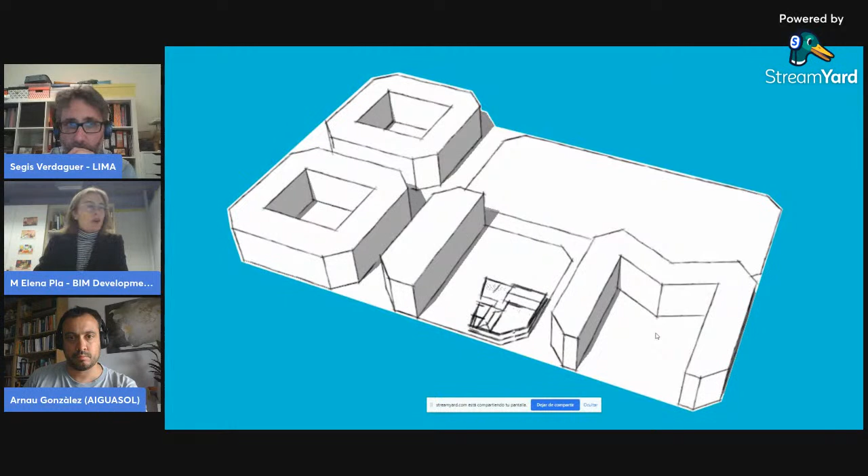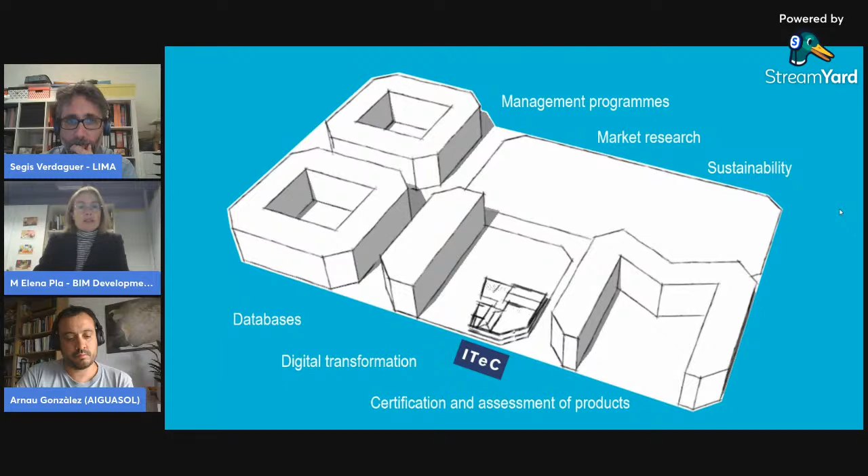So we are placed here in Barcelona. We are, let's say, placed in the eye of BIM, in the eye of the information, dealing with management, market research, sustainability, digital transformation, databases, and certification and assessment of building materials and products. So all this mixed together, when BIM came, we knew we already had some ideas of how to handle these digital challenges that BIM was setting.

What is, in a sense, BIM? I imagine that most of you are aware of it, but just in case there was something somebody didn't know, I wanted to point out the main idea of BIM. The main idea of BIM is a digital method to convert the ideas and to project and develop the projects in the digital environment.

Let's say we have the physical environment, the atoms. We have the first idea of the project, which is to plan it - let's do a school, let's do a building, let's do a stadium. We take these atoms, we plan them, and everything is done in the digital world, besides our heads of course, and we design and build together, and we get to the final product, the physical product, which is the most important product and the final goal, but there is also a digital twin of this final product, which will afterwards help and ease the works of managing the physical product. So this is in essence the BIM process, or the digital transformation in the building sector.

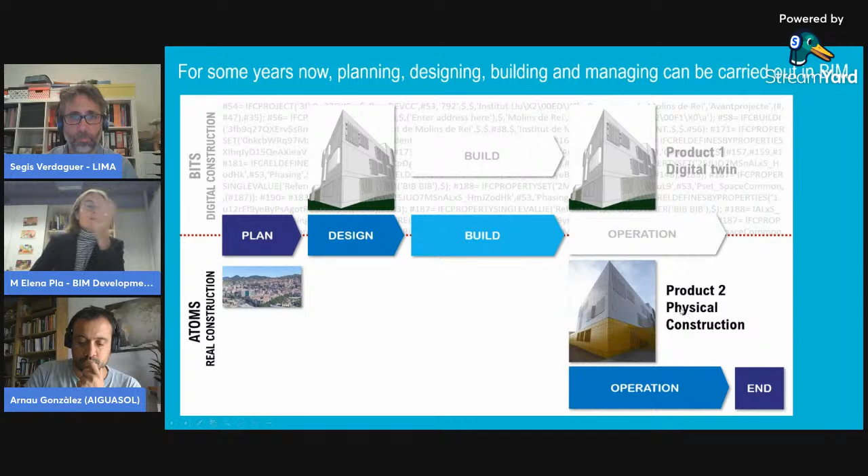And we must be aware that there are two products to be delivered, the physical one and the digital one. No one should think that only the digital is to be delivered, or that anyone working in the middle stages should think that only the physical is to be delivered. So both of them are equally important.

And what does it mean if we go inside this design or build part? How do we work there? We can work with the BIM models enriched with data, with all sorts of structured data, and together what we do is enrich and complement them with the digital databases that we already had, which are very rich and complex to handle themselves, and that cannot be fully integrated in the BIM models, because BIM models have limitations - some elements are not modeled or whatever. So we do this complementary work of databases with BIM models, or BIM models with databases.

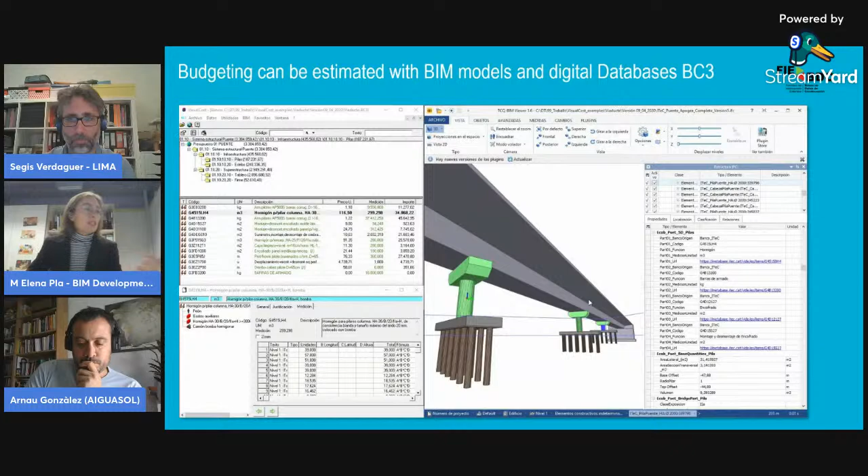So we have this dual digital world. This is how we work. Everything can already be done in manufacturing things - the manufacturing industry is already digitalized. So how do we convert this physical item into a digital thing?

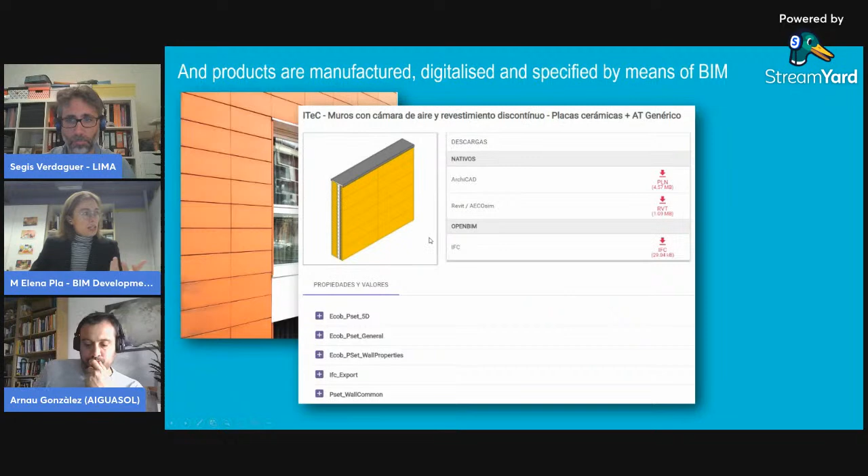Everything should be inside the digital model. This is the challenge: how do we start working? How do we convert this into bits?

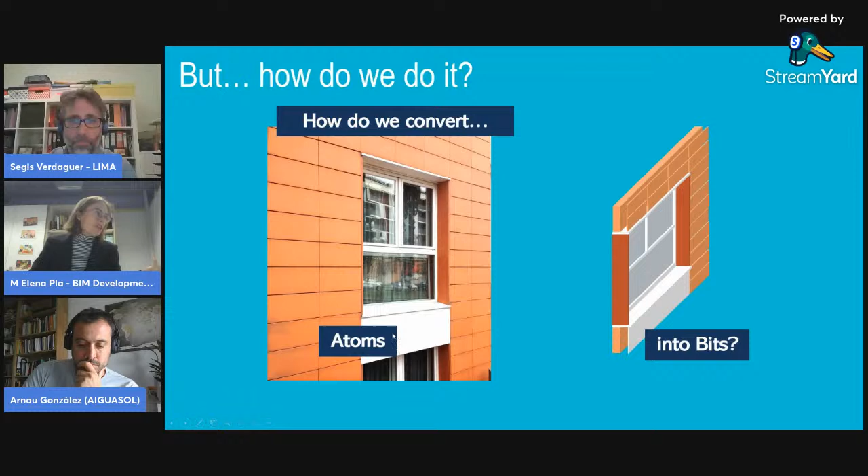Let's say the first bits we think of are pictures. If we look in Pinterest, we can see this kind of facade. But these bits, this digital information, isn't the only one we are interested in.

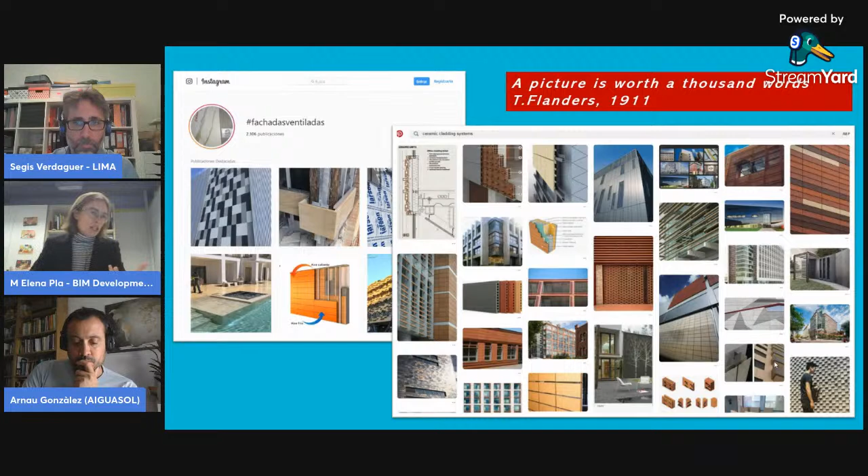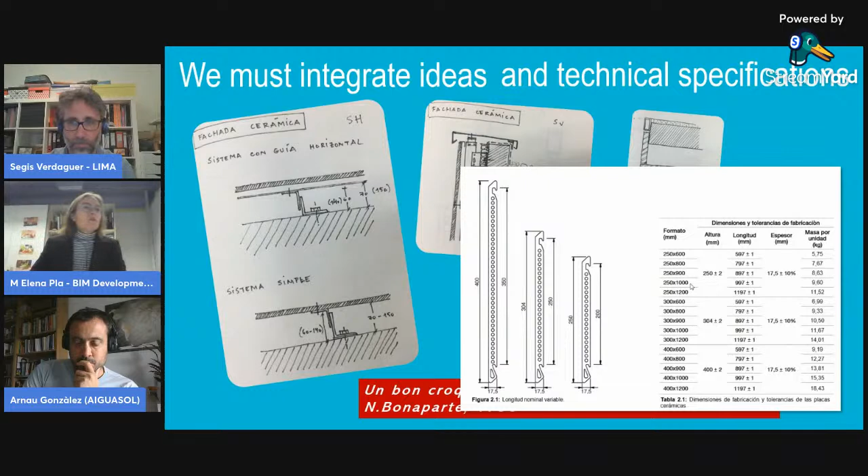We are also interested in geometry, in drawing our ideas and integrating them with the technical specifications of the manufacturers, which is not the same. I may have an idea, but maybe it doesn't fit the size of the tiles, the color, or the kind of material. Maybe it doesn't fit with the manufacturer's definitions.

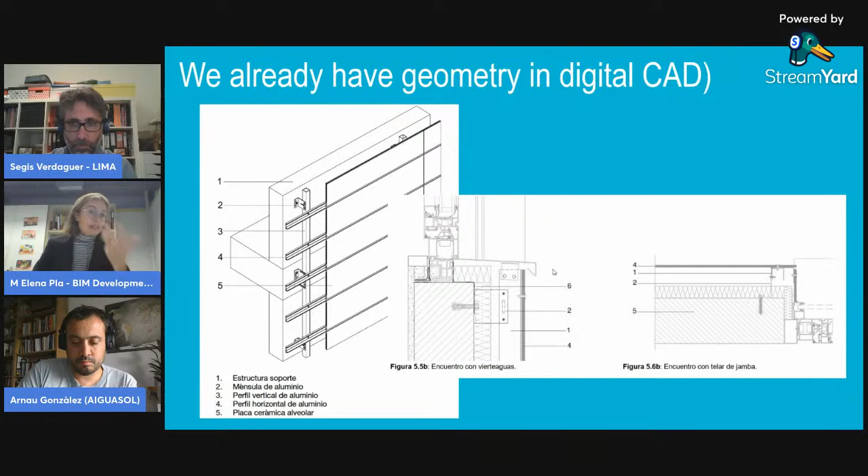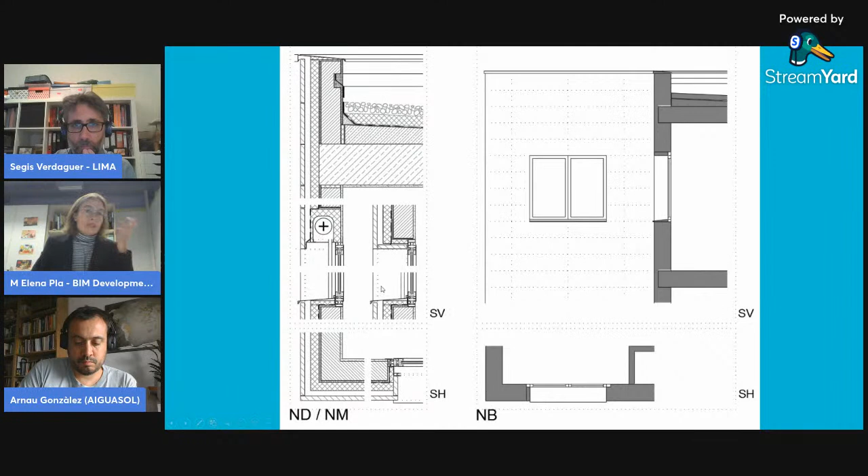So the challenge is that we can count on the CAD drawings of the manufacturer, and we can also count on the CAD drawings of the design team. So at the end, that facade can be converted into this.

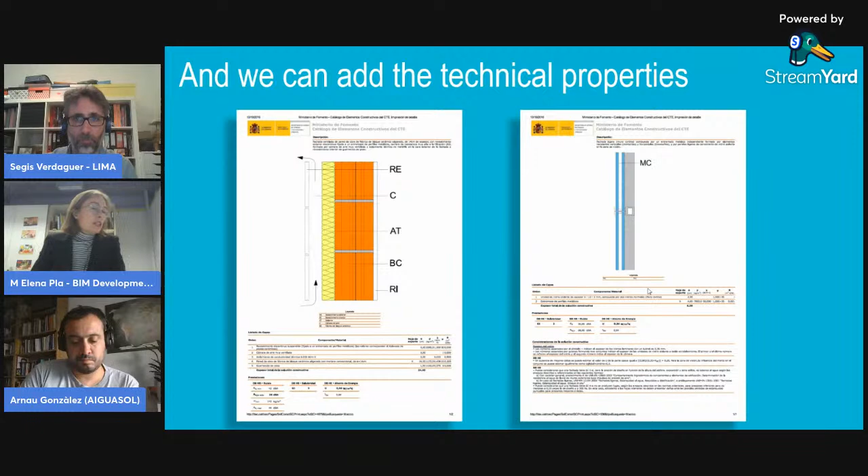And when it comes to BIM objects, we should also think of integrating the technical properties coming from generic items or regulatory conditions that we may have.

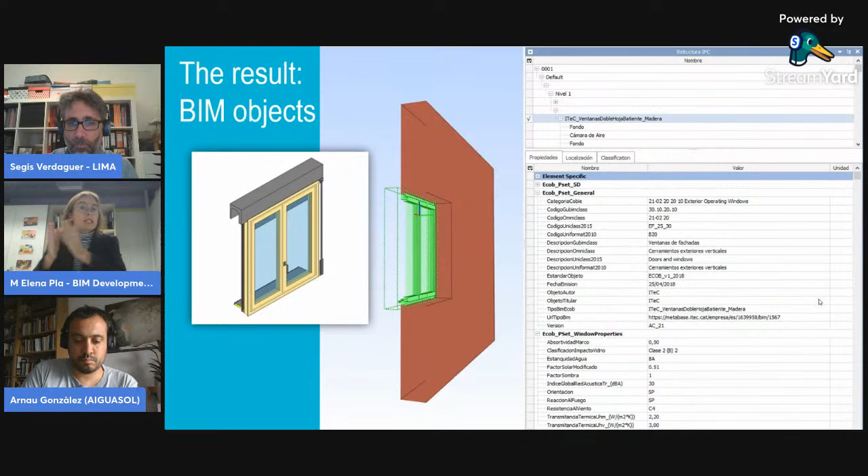Everything can be integrated, so the result is these BIM objects with structured information. And the structure of this information is also a very useful tool you can count on, which is the ECOB standard, a standard for creating BIM objects that defines how to name the properties, technical and management properties, and how to define the values.

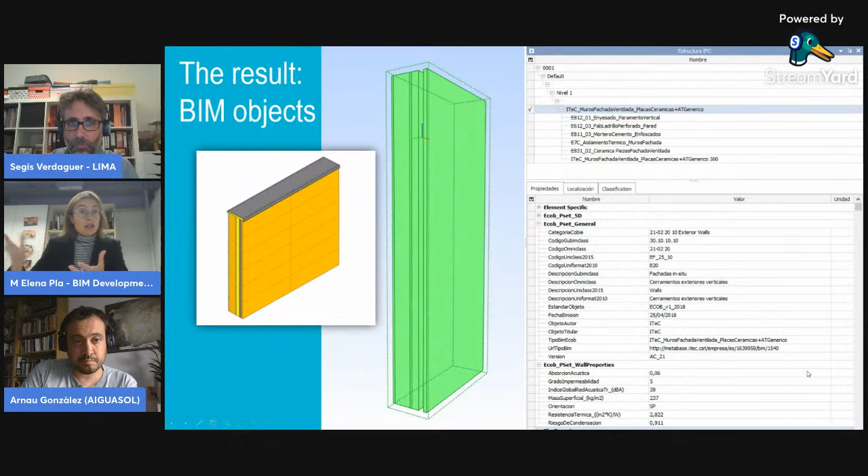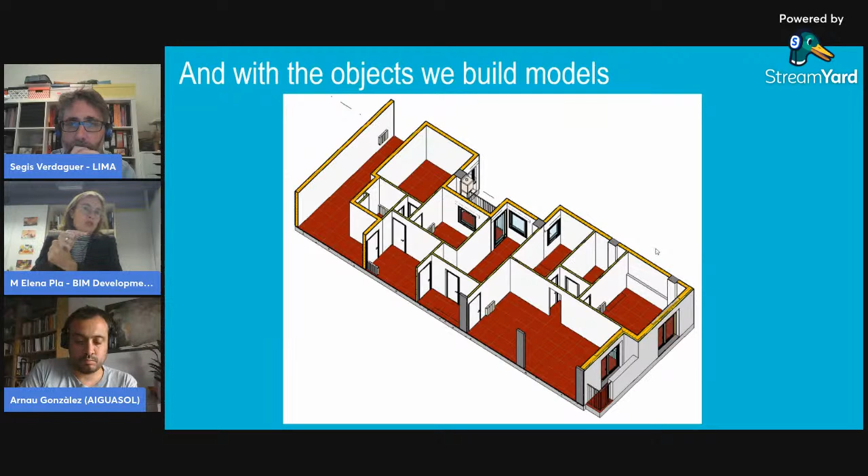So at the end, with these objects, what are we going to do? We have this 20th century plan, but in the digital momentum that we are in, this is the way we should do it now. So every project should be digital in these terms.

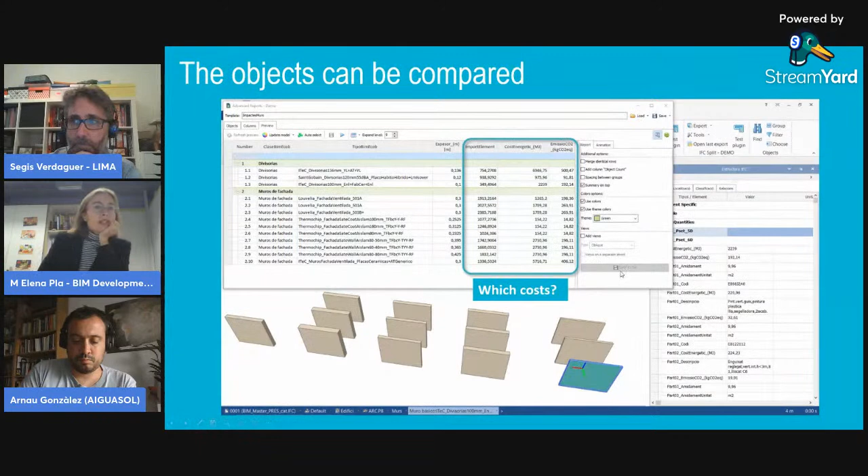This allows us to compare, for example, if I have every kind of wall or facade structured in the same way with the same properties, I can compare. This helps me compare anything that has been introduced in the BIM object besides the geometry. The geometry is already there, the thickness of the wall, but I can also compare the energetic cost if I have it, or the CO2 emissions, or the price.

So this would be the bunch of tools we are working with. We have our BEDEC database of building elements, we have BIM libraries, we have the ECOB standard, and we have these programs TCQ and GMA, and a viewer for this. With all these tools, the result is that at the very end of the project, you can have, element by element, the amount of energy and CO2 emissions, for example.

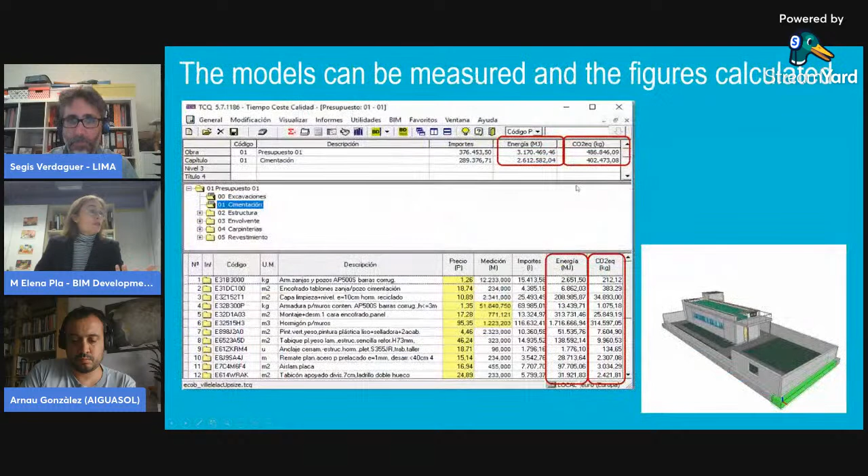But altogether, I can also have the whole big budget. And afterwards, I can pour this data into the BIM model, and I will get this data well structured in the BIM model.

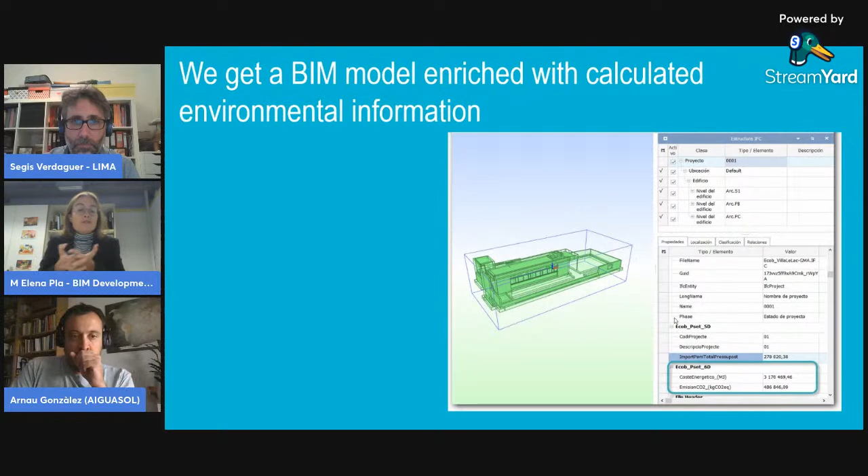So what do we get at the end? I get the geometry of the project in a digital shape, in the digital model, enriched with data, with valuable data that may help me make a well-informed decision in the project. More or less, I tried to be very quick. This is in essence what we are working on.

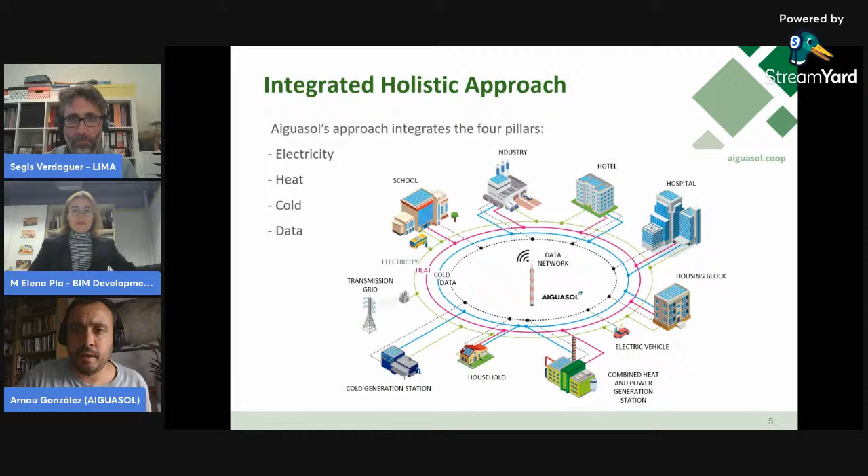As I said, we are approaching our projects taking into account energy consumption from different vectors - electricity, heat, cold - but also we integrate, and that's important here today, data management into our projects in several aspects. One of these is the development of digital tools that can help designers and practitioners inform their decisions and do better designs. So the two projects I must stress today: one is Plug and Harvest.

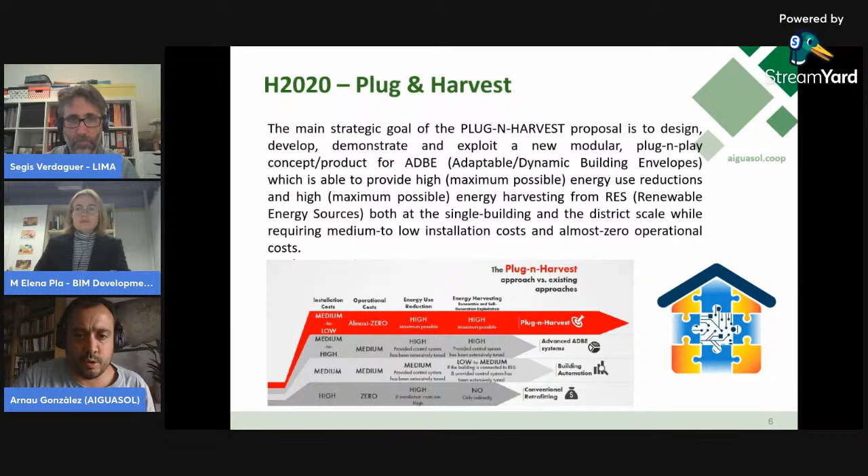Plug and Harvest is a project that is finishing this year, focused on the development of a circular facade solution for the renovation of residential buildings. The other one is Houseful, a project focused on the development of several solutions, a set of 11 solutions. One of these is the circularity methodology that informs the circularity tool that I'm presenting today.

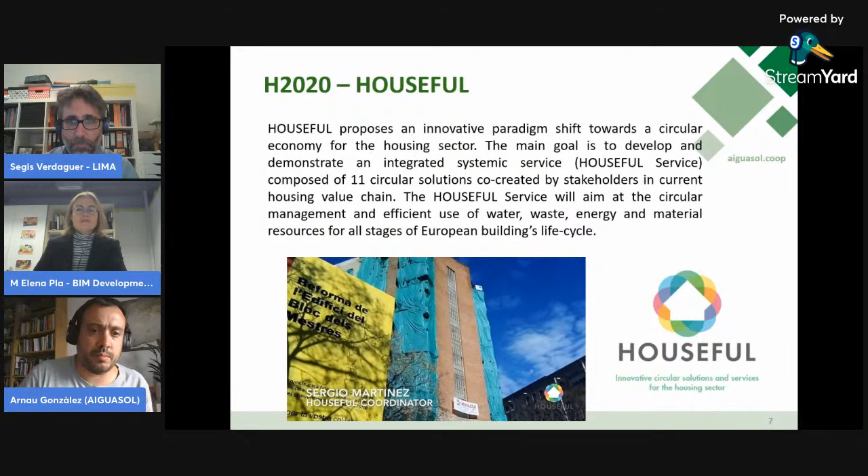So with the work of these two projects, we have been working on the development of this approach from a methodological aspect first, and then converting it into a digital tool based on a web environment, so it can be used by end users easily, only with access to internet connection.

So how do we see circular economy? This is the basis of the methodological approach that we implemented. According to different definitions and existing frameworks, and also taking the approach of the Houseful project, we wanted to evaluate circular economy from a holistic perspective, but focusing in detail on the materials, water, waste, and energy vectors, which are the ones that create the most relevant material or natural resource flows in building construction activity - the most used natural resources when building and operating buildings.

So our approach comes from the detection of the necessity of focusing on building circularity from a broader aspect than materials itself. There are many experiences working on materials circularity evaluation. Materials are important, obviously one of the most important, if not the most important aspect when designing a building, but taking into account the whole operational stage of the building, energy aspect becomes critical, also water uses, and we also wanted to focus on different impacts - social impact, environmental impact, and economic impact.

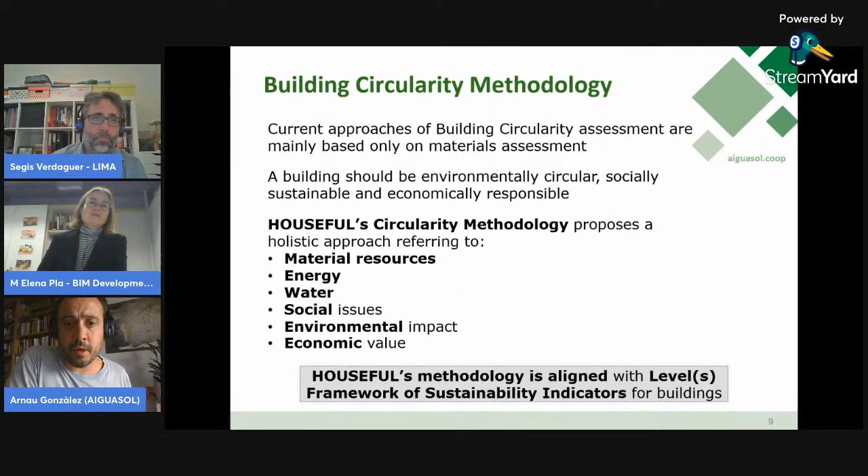This is aligned with the current Levels framework from the European Commission that most attendants will know, and is also aligned with current standards on sustainability of building construction works that advise taking into account the whole life cycle from a broader perspective - from the product stage in which the products that conform the building are manufactured, to the construction stage, which is a very intensive resource-consuming stage, and also the use stage, which is critical because a building is usually designed to last 50, 100 years. So all impacts in the use stage become very relevant when taking this life cycle approach. And obviously end of life processes, which means deconstruction, residue treatment, and disposal, and so on.

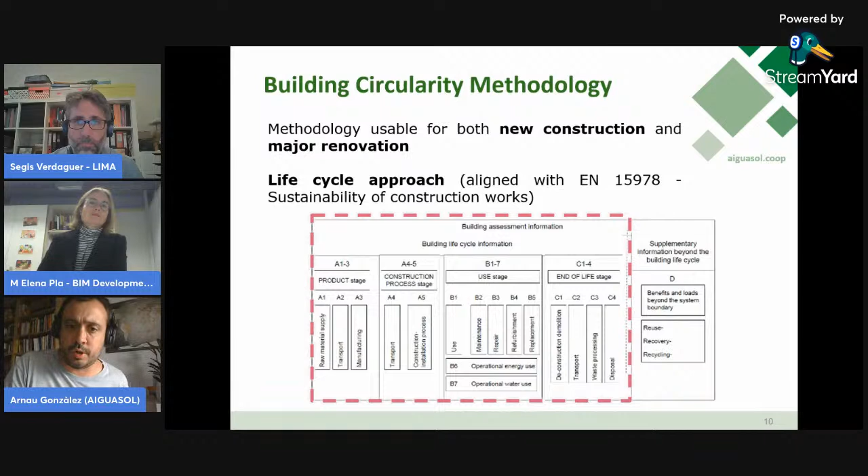So our methodology and the tool I'm presenting evaluates circularity with 6 different indicators. 3 are flow-based indicators - materials, energy, and water - which basically measure the degree of circular flows into your building construction and operation activity. So we perform a kind of life cycle analysis, but a flow analysis in which we see how much energy is consumed and how much of this energy comes from circular sources. Same with materials or water.

And we also incorporate three different impact-based indicators. We call them impact-based because these relate to the current standards and the three aspects of sustainability - social impact, environmental impact, and economic impact. So we are aligning our methodology with the current standards and regulatory framework from the European Union.

And what does this tool do? This tool basically performs a 6-pillar assessment in which we evaluate and provide results to the end user with the rate of circularity in energy, water, materials, social impact, environmental impact, and economic impact.

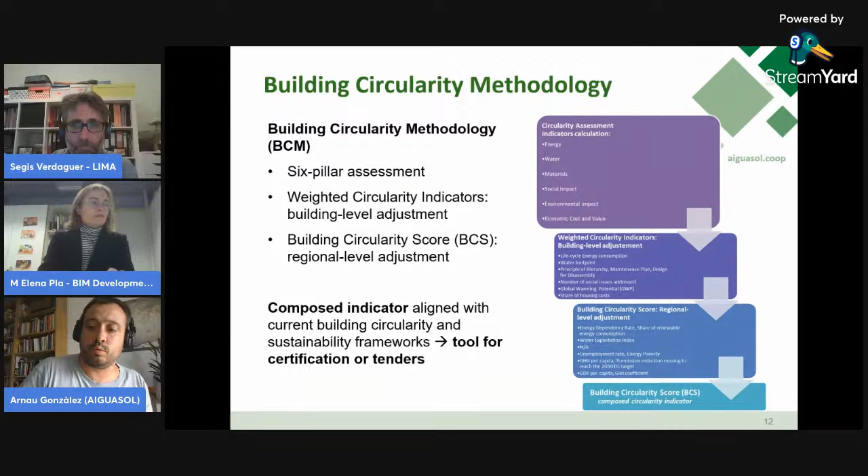So this is the composite indicator that weighs in all the different vectors into one single indicator that can be compared and used for certification of circularity, to include as a mechanism in tenders, or could even be included for sustainable funding or alignment with the EU taxonomy to get certified as circular investment for building stock.

So I've explained a lot of the methodological approach, which is important, but I'm going to show you how this is converted into a tool and a usable tool. We did this implementation of the building circularity methodology into a web-based tool.

This is just a capture of how it looks in the guts of it, the coding and programming of the tool. It's important that we programmed it in Python, because that allows us to integrate it with different structures and environments, and we are doing that currently.

We're integrating existing construction products databases, particularly BEDEC, the database from ITEC that Elena mentioned a couple of minutes ago, but also we are working with Madaster, a tool for materials passport developed by a company from the Netherlands. I put here just a capture of it, but I'm going to switch to show you the usable part in detail.

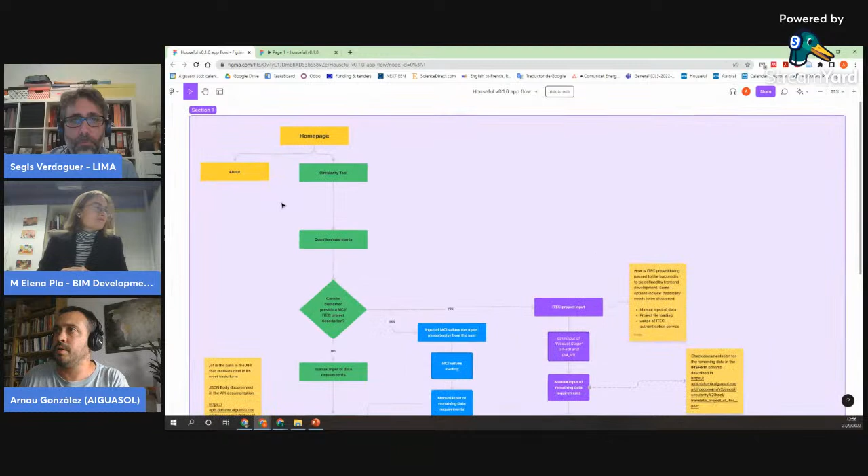The idea of this flow diagram is to show how a user can interact with this tool. This circularity tool will require the end user to input a lot of data.

At the current point we have a shortcut: if the user can provide a project from ITEC BEDEC, or GMA, or TCQ GMA, or Madaster, the end user will have a shorter input data phase, because most of it will be imported directly from these databases. If not, we allow the end user to manually input all the data, which is quite a lot, because for a building project you have lots of building products with lots of information.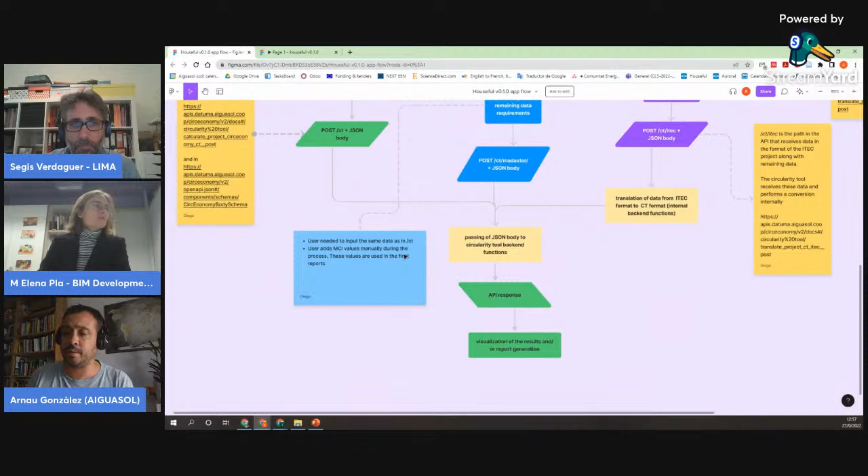This is something that is then posted via API to our circularity calculation engine, and we post back the results of the calculation. The idea is that this is something modular that can be implemented with, as has been done with some existing products, but could also be implemented in other tools, or potentially in a BIM environment, which would be our final aim.

Coming back to my presentation, the last thing I want to show you is how this is shown or implemented into a flexible user experience, into a web-based tool. So in this case, I also switch to my presentation.

Here you can see how we envision this tool would look. The idea is that it's a tool that allows you to evaluate the circularity of your building at every stage. You can register yourself into the tool and input the different data. If you have an existing project, we can connect that, and if not, you can enter the data yourself.

The results page would look like the one in the slide deck. These are just sample graphs. The idea is that you will have a dashboard of results where the end user will see the different circularity metrics in bar graphs or circular graphs, plotting the degree of circularity of all the vectors and the final score, as well as a loader report with all the information.

So that's it, I tried to make it quick. You have my contact information in the slide deck, so if anybody has any doubts, I'll be happy to answer them.

Thank you, Arnau, thank you very much. It's very interesting how we can use BIM to introduce data within this modular complement to the BIM model, to assess the circularity score of a building. Thank you very much.

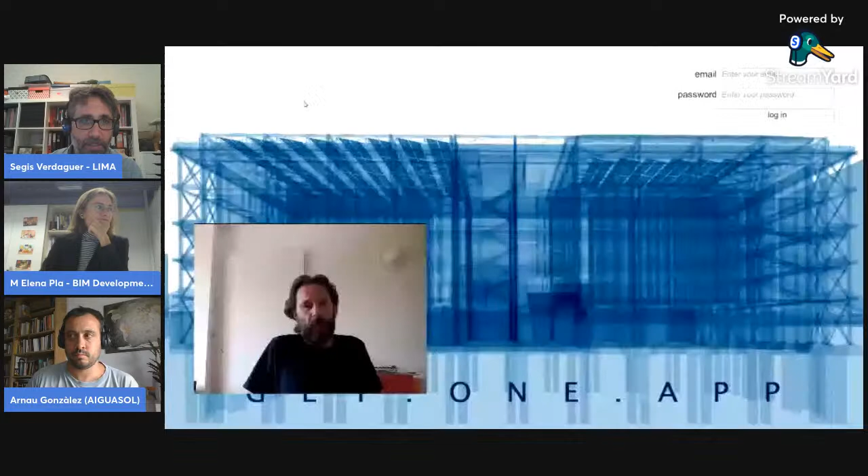Since Professor Annarita Ferrante and Anastasia Fotopoulou are working on the pro-GET-onE project, that is a project you will see later on for deploying exoskeletons on existing buildings to improve their energetic efficiency and seismic resistance. The exoskeleton is afterward filled up with modular spaces. These spaces can be balconies, rooms, or other spaces, etc.

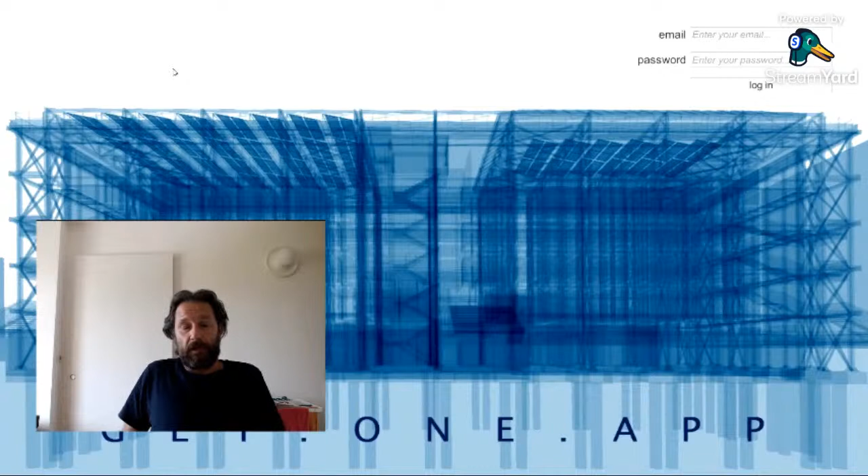And all these rooms are a choice of the user. The user can choose which kind of room they will have. Annarita and Anastasia will tell you more about this, so I won't spend a lot of time on it.

After some time, they asked me if I could find a way to interactively show the final users or owners of the units an automatic way for rendering their living units according to their choices and customizations.

At the beginning, we thought about using a photorealistic rendering plugin for BIM projects called Enscape, but this plugin was not giving us the possibility of rendering a scene in an interactive way according especially to the user's choices. For this reason, we decided to use Unity, which is mainly used as a game engine.

Unity is recently gaining growing success in AEC - Architecture, Engineering, Construction. Some colleagues at my department are also starting to use it in the field of cultural heritage as a tool for reproducing digital twins of artifacts. The Unity engine uses an easy scripting language called C#, and it can generate applications for multiple platforms: Windows, Apple, Android, iOS, and even for the web through WebGL.

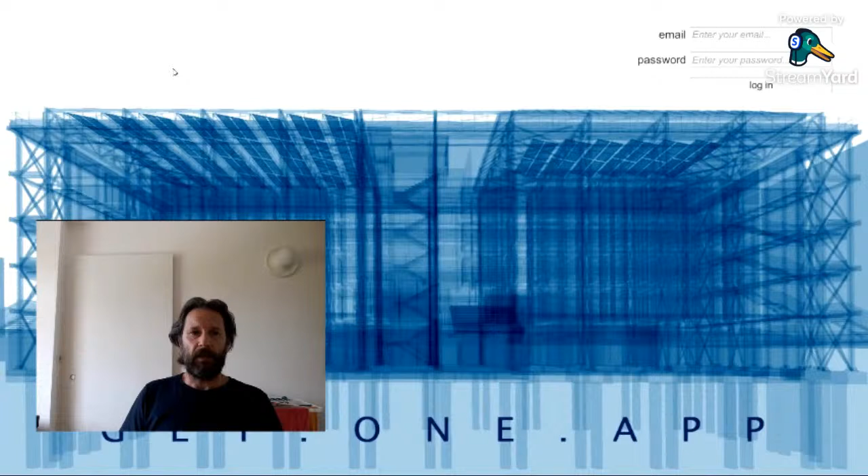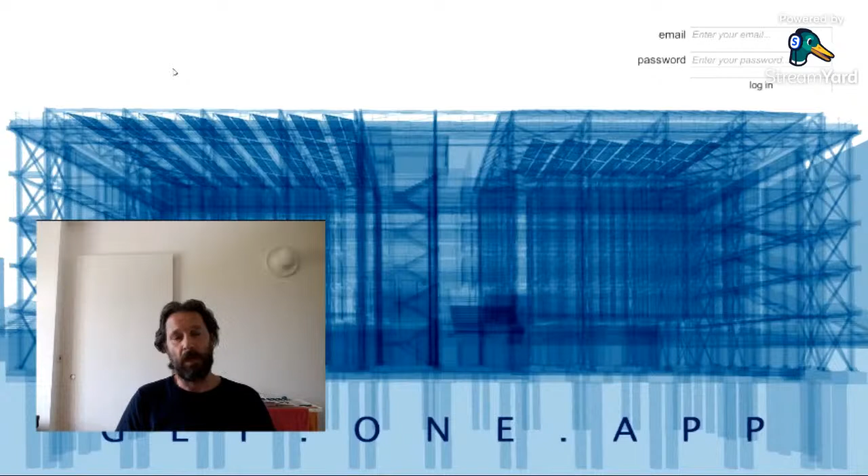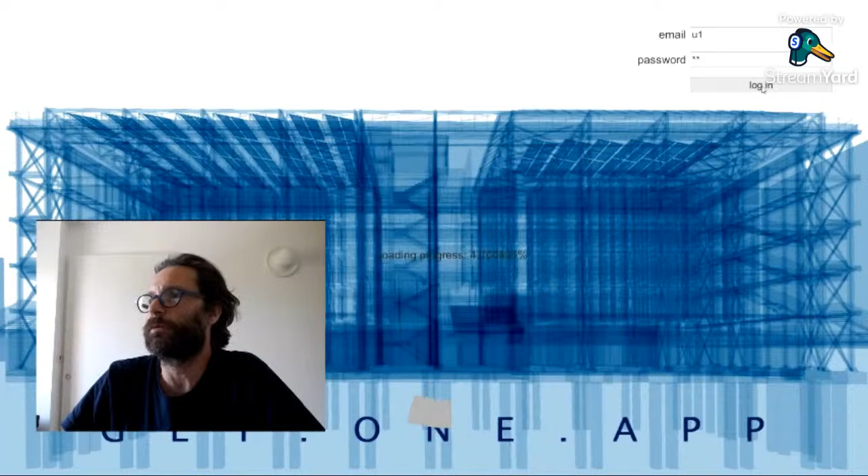Okay, here we are at the login screen of the Get One App. We use our credentials, the credentials we received as users, as owners of the building. I have particular credentials since I'm an administrator. The administrator can work on every flat, while the simple user can work just on one. As I press login, the application starts to communicate with the database in Europe, so it's a centralized database.

And here we are brought at the Get One App project. So it is basically the test building with its exoskeleton, where all the units have been customized according to the user preferences. As you can see, when I click on the mouse button, I can move around the scene very quickly.

If I use the central mouse, at least in the Windows environment, I can zoom in or zoom out. And if I use the right button, I can pan on the scene, up and down like this.

You see that in the right part of the screen there is this button that I can click to show the user interface. This is the part that allows the user to interact with this property.

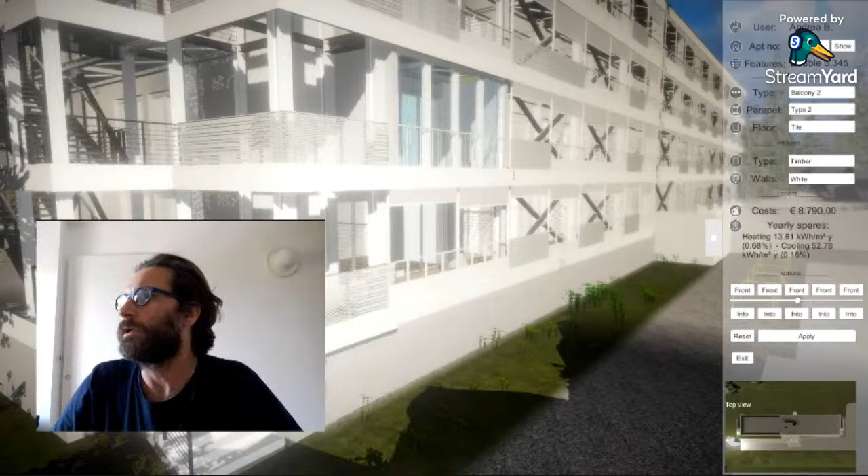So here I can see my name, of course, because I logged in with my credentials. I see the apartment on which I'm working. Since I'm an administrator, I'm working on apartment 1, but I could work on this list of apartments. You see, if I select one, I'm going here.

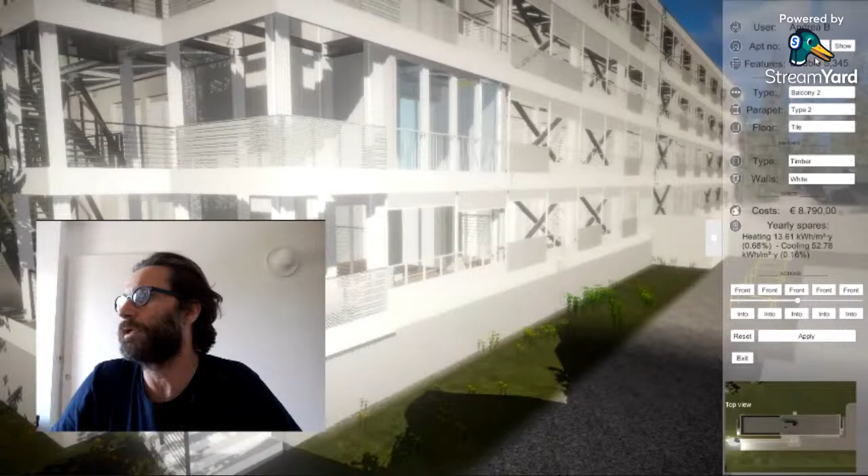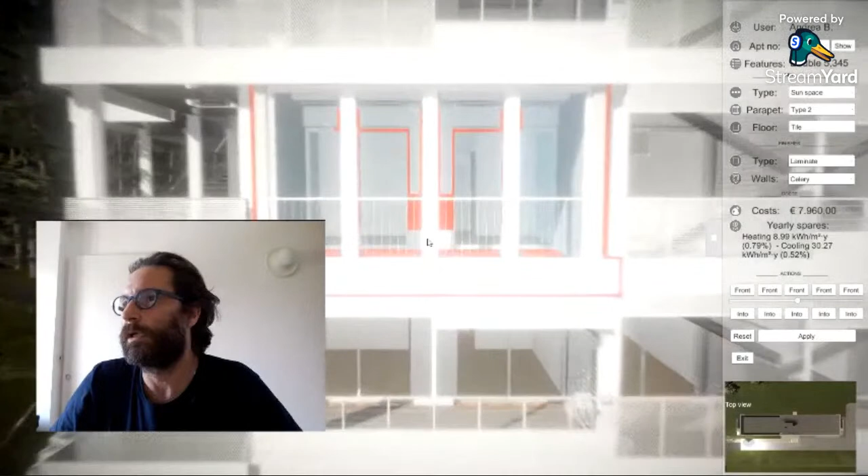If I select number 3, then the flat on which I'm working is highlighted now, and if I lose it, for example, I can press the show button to see the apartment on which I'm working. But of course, if I had been a normal user, I could work just on my apartment.

So let's go back a little bit and let's see what these other buttons can do. Let's go to the bottom part of the user interface and click on the front buttons. There are 5 front buttons and 5 into buttons.

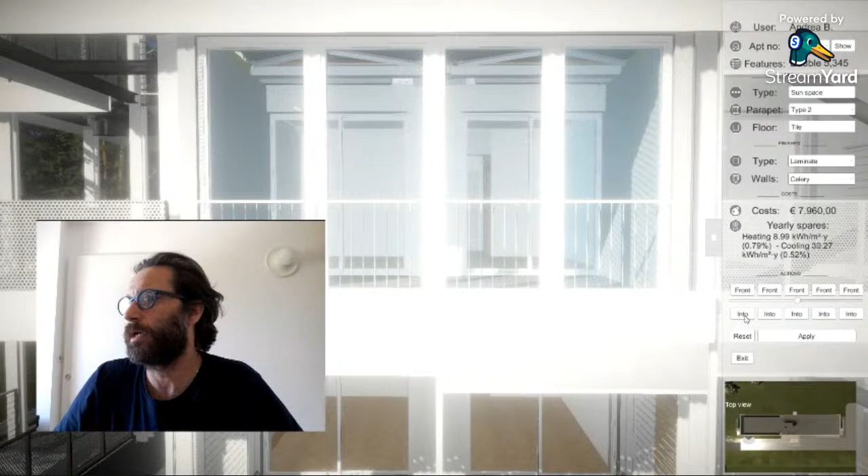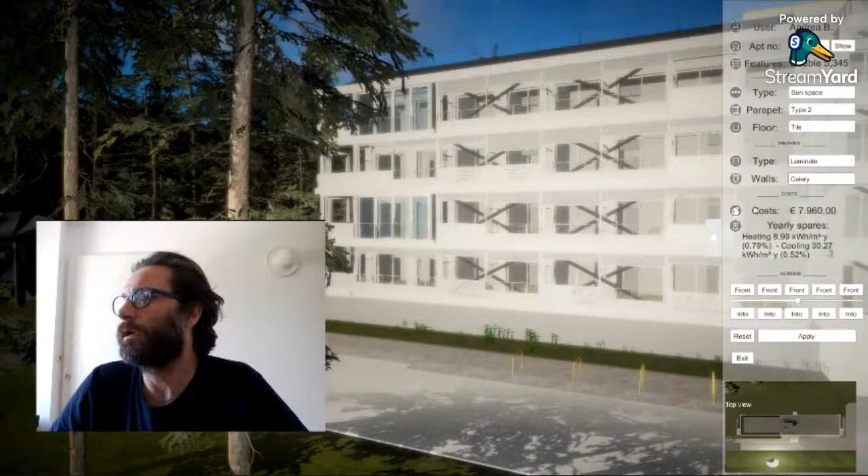So if I click on the front button, I'm brought to several positions to see which was the apartment, centered on the apartment on which I'm working. Again, if I click it, and for example I cannot see the apartment from here, I can press again the show button to see the apartment on which I'm working.

But there is also this into row, and I can click them to move around my apartment.

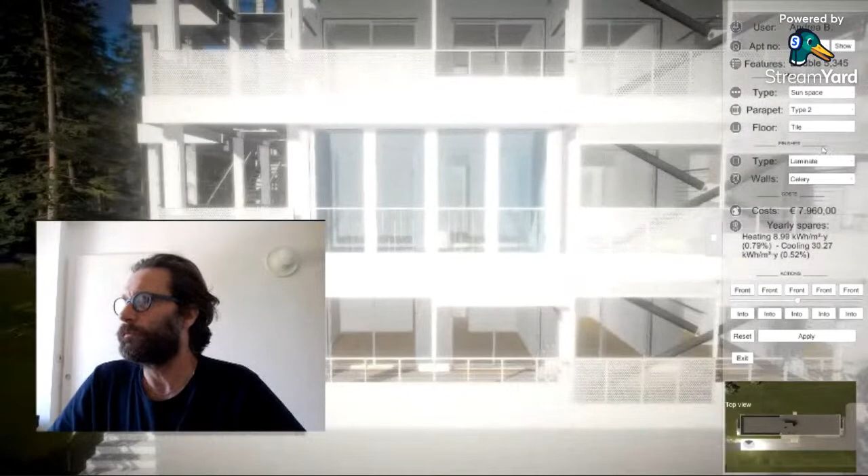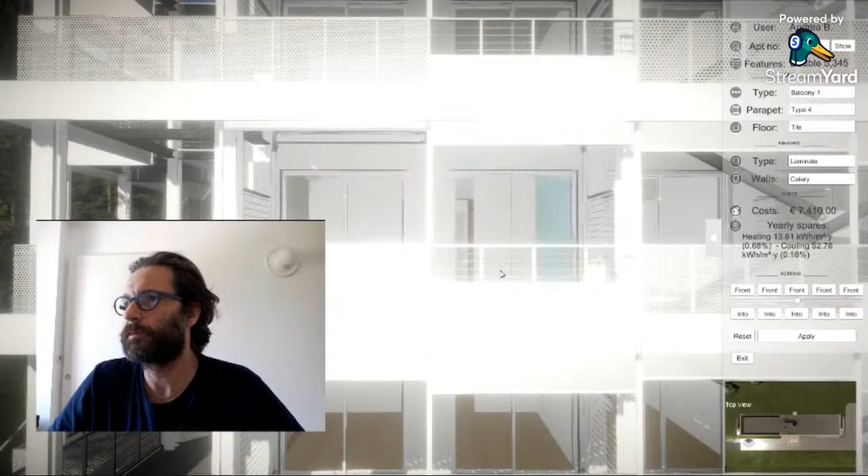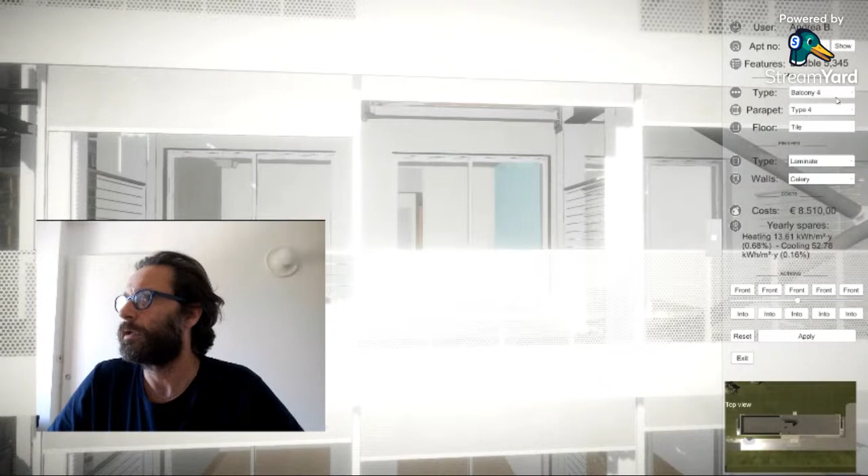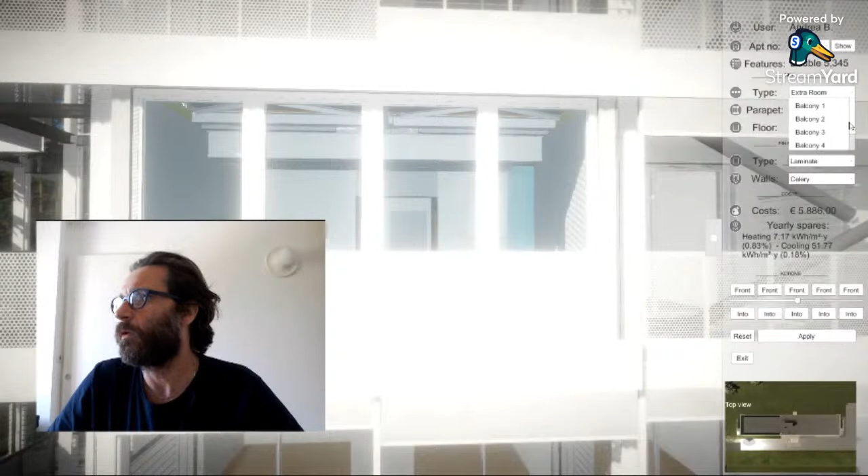For some specific balconies like this one, I can change the parapet type to 1, 2, 3, 4. You see that the size of the holes in the balconies are changing. Sorry.

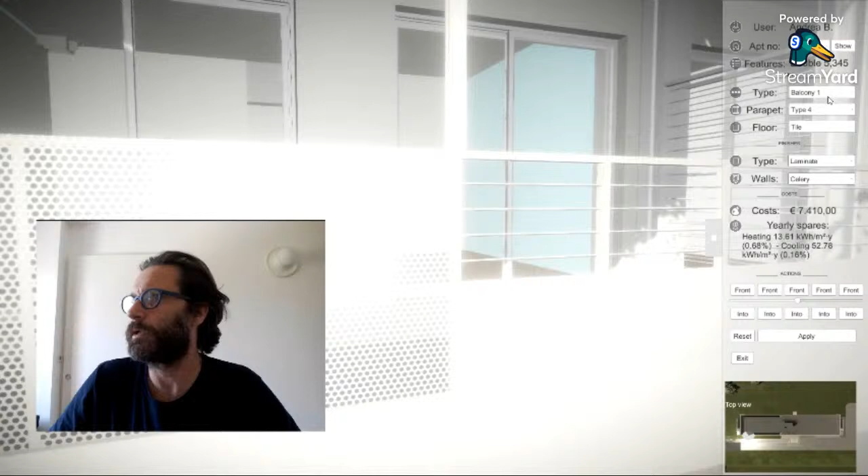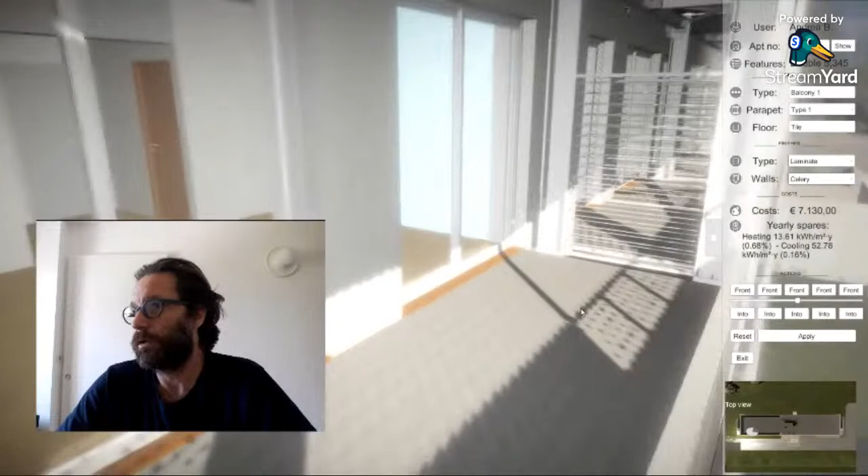But I could also customize the appearance, the materials that I use on the balcony. For example, I could choose to use laminate.

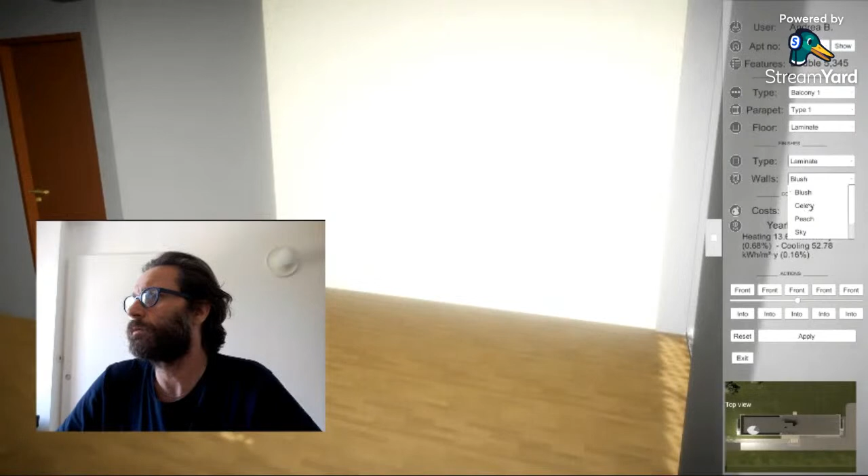And I could also change some features here in the walls, changing the colors of the walls, for example, or again the type of floor that I can use.

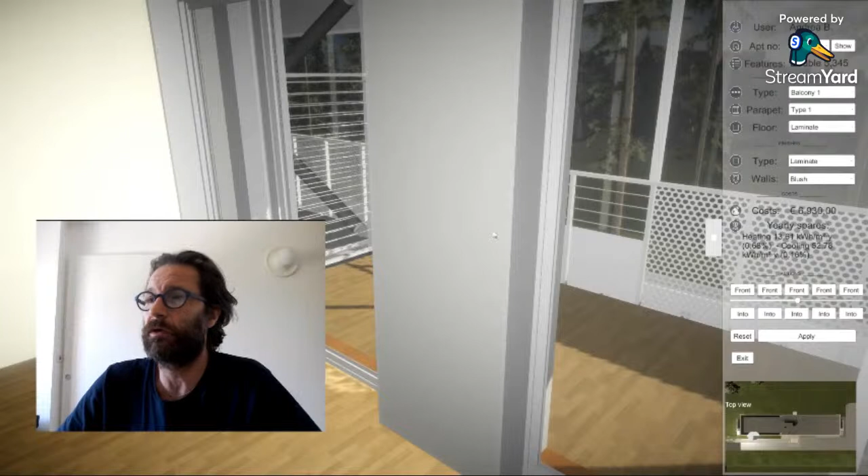When I'm satisfied with the results, considering also the costs and the spares, the yearly spares of the particular combination, I can click on apply to save the results.

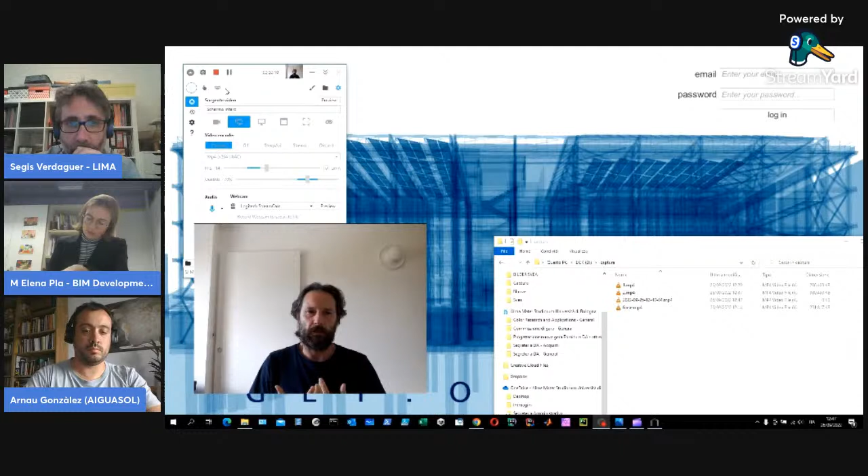Okay, so now the question is: is it possible to generalize this application to make it a kind of product that we can use in a different environment? Well, at this moment, this app still needs some skills to export the models, the submodels, and to import them in Unity engine.

Moreover, the user interface, the panel on the right of this app, is today designed for the specific needs of this application and on the customizations that I specifically thought for this app. But once we have solved these two tasks, the answer is yes. This app could become a general product.

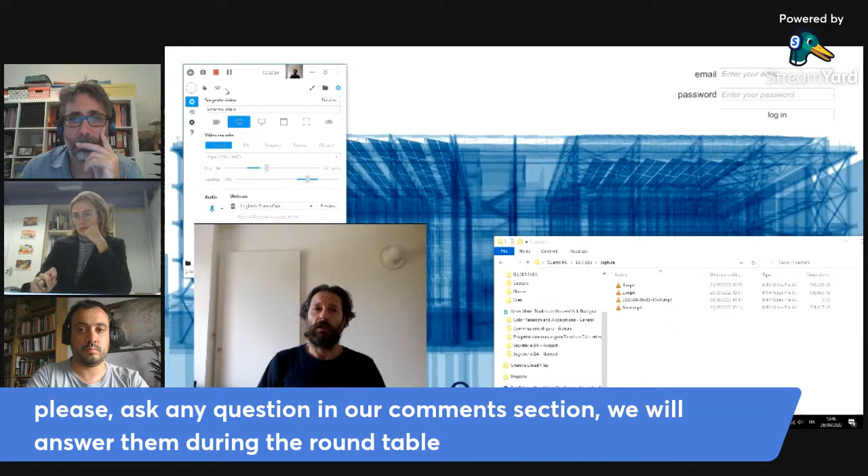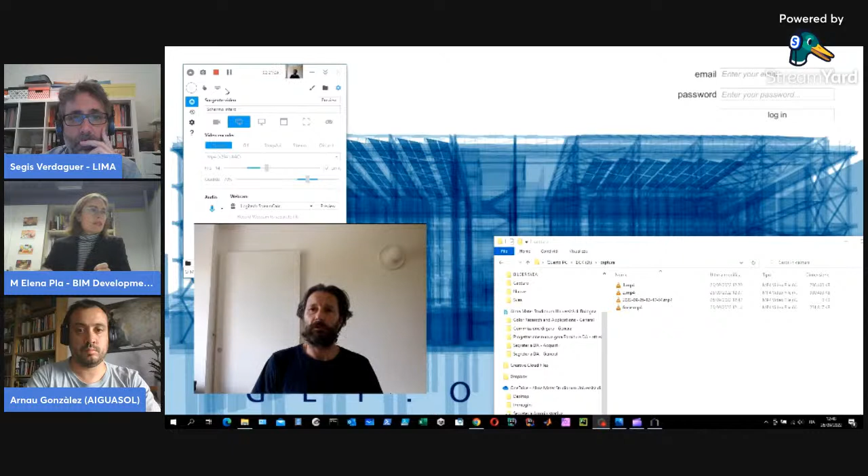So, thank you all for watching this presentation from Andrea about this application that allows end users to tailor and customize their buildings or renovation works, in that case from project to project. But I think it can also be applied to other solutions applied to building renovation. So if you agree, Arnau and Elena, I have some questions for you, and if you have any questions about your presentations, you can also talk about it.

So the first question: I would say yes, but anyway, I would like to hear you. Is the BIM model of the building necessary for all the new digital tools?

I would say it's the first step when we think about potential applications or digitalization of buildings. From my point of view, I would say yes. The digitalization of the building sector relies on the key factor in this mixture of geometry and information model.